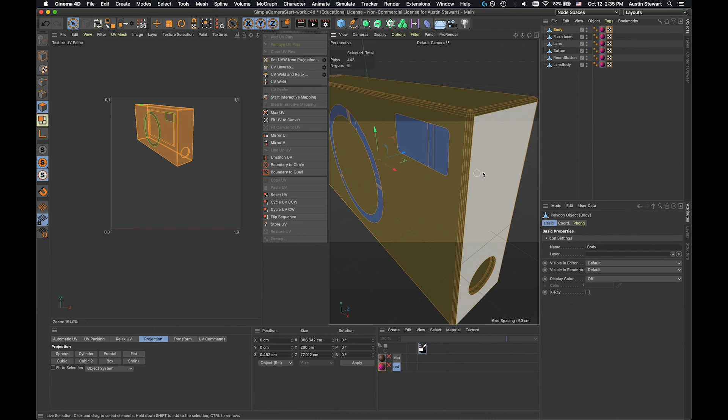Because this is, even though it's got holes, it's technically a watertight object. And we're going to need to do some work to get that to function well and be something that we can easily work on. And there's some of these areas where there's what I'm going to say are like more challenging surfaces, and we might want to cut those away from the rest of the object in order to make sure that everything goes smoothly. So I'm going to go ahead and get started.

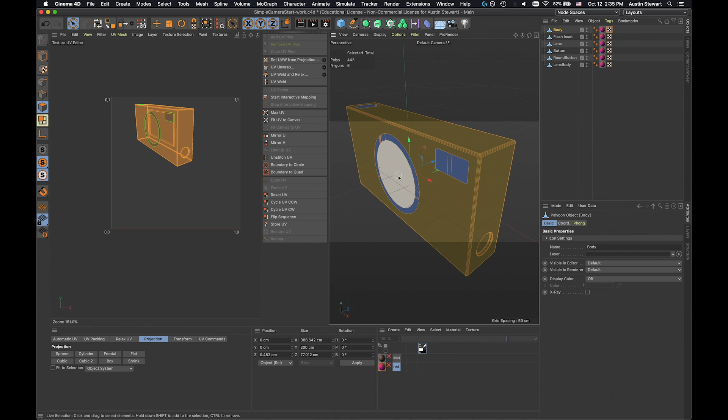And let's say we want to start with this object, this front face. And I'm not going to select any other rounding on here. I think I'm going to leave that for the other objects, just so we can get started with something reasonably simple. So what I do want to do is I want to select this polygon, and I want to hold down Shift and select this polygon. And I just want to go ahead and click UV Unwrap.

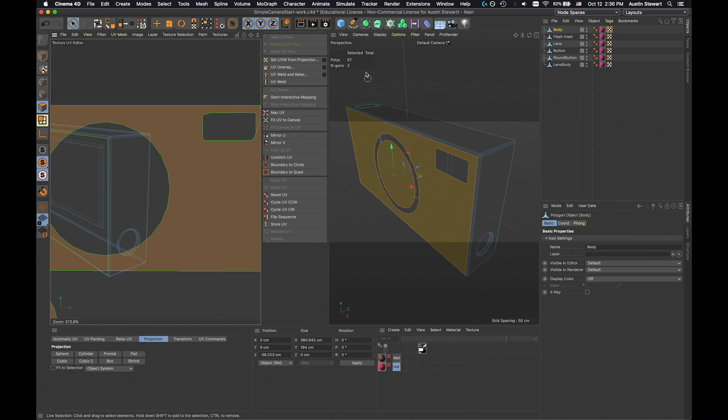And when I do that, I get what at first looks like an okay result. But when I look up here at this hole here, it is totally and completely distorted. Right? If I was to go turn back on my shading, you should see a lot of warping happening here, and then this is actually rotated on its side as well. So neither of those things are what we want. So I'm going to undo that action.

And we're going to do a trick here in order to get these to be aligned to the way we want them to. The first thing we're going to do is we're going to rotate our view so that the front of the camera faces the camera. Right? Okay, so the front of the camera is facing the camera. I can select both of these polygons again. And then I want to look at my orientation. Y is up and X is to the right.

And I'm going to go ahead and go to my 4 views. I'm going to look for one where Y is up and X is to the right. Right here, Y is up and X is to the left. So what I want to do is I want to say, okay, well, it's not the back. I need it to be the front view. So I'm going to go to Cameras and switch from back to front and zoom in a little bit.

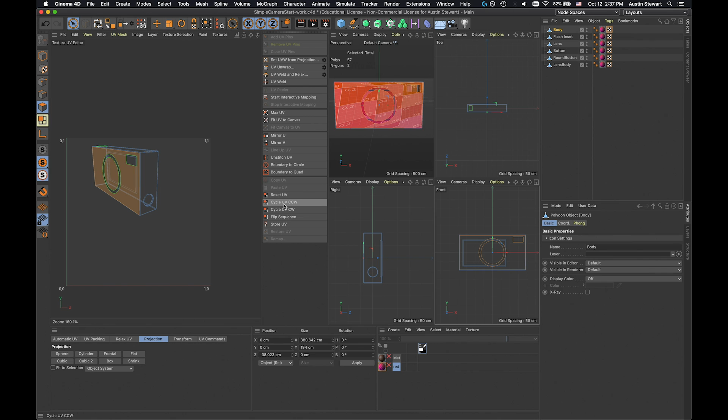And then what I can do at this point is now I can do what's called a frontal projection. And so I'm going to go ahead and go to my projection, and I'm just going to click on frontal. And what that does is it very cleanly orients this and makes sure there's no distortion. And so now when I look at these numbers, right? They're aligned, everything is happy and good to go.

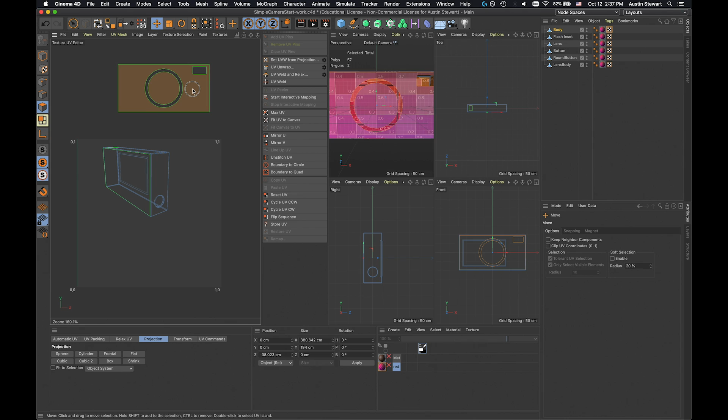So I'm going to go ahead and use the move tool. I'm going to hit the letter E. I'm going to pull this up out of the way, and I'm just going to go to select, hide selected. Okay, and what's nice now is we haven't really seen this in the other ones, but as we get rid of planes, because we have solo mode on, if I had solo mode off, we would still see everything, I think. But because I have these things set, we just see the geometry that we have left.

So let's go ahead and look at what else we have to do. So this is another one that's got a hole in it, and that's, again, going to potentially be problematic.

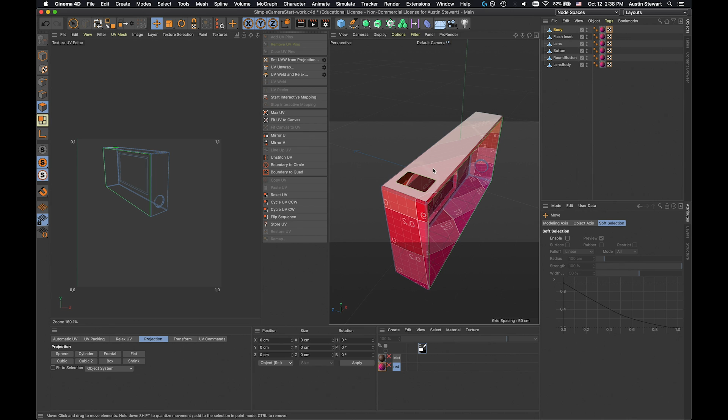Now, with this one, what I think we should do is take all the rounding on this one too, because I want to show you how we'll deal with that. So we're going to select our top polygon. I can use the move tool, I could use the live selection tool. And then we need to change our display so we can actually see.

There we go. I'm going to use the grow selection command to see if I can grow my selection to select all of those additional polygons I need to select. I could also probably use loop and then fill. So let's try that first, actually.

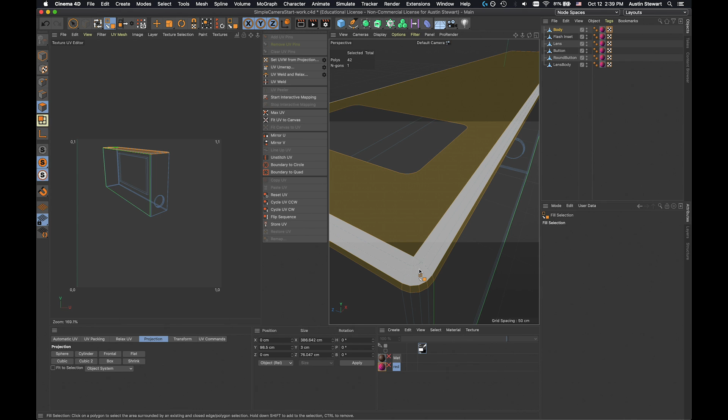So I'm going to hit the letter U, the letter L. I can loop this. I'm going to hold down Shift, select that, and then I'm going to hit U and F. And now I can fill in the rest of that selection, right? So this is another quick and easy way to select all of those things. So I've got these selected.

Now I'm going to rotate my view until this plane is facing the camera. The Z is up, the X is to the side, to the right. That's my perspective view. Here we go. Here's the top view. I'm going to zoom in just a little bit. I'm going to do a frontal projection.

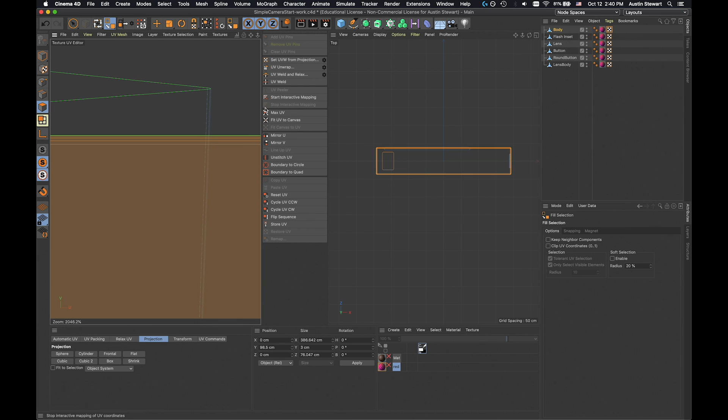And now I have something that I need to do. With this frontal projection, these are not proportionally sized, right? They're squished together because we're looking straight down on the object. And we want these to be spread out more. So I should probably do a UV unwrap.

Now, if I do that, things go very sideways very quickly, right? So that's not what we want in any way, shape, or form. And I can tell you from experience, even if I go in and cut these corners, that center shape is still going to be totally distorted. So I want to be in polygons mode, and just select this center polygon.

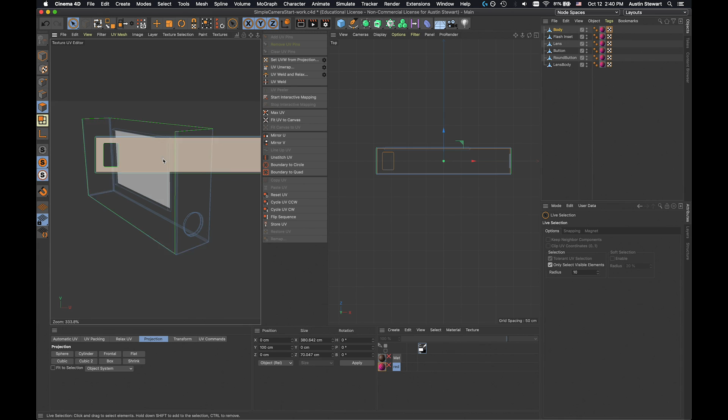I'm going to use something called UV pins. I'm going to add some UV pins to this, which will pin this in place while I'm able to open up and manipulate the other parts. I've selected that center polygon. I'm going to hold down Command or Control, and click on Points Mode. That selects all of the points for that top polygon, these internal ones and those external ones.

I could also have gone to Points Mode and loop selected the outside polygon points and these points, but this is a faster way. I'm going to click Add UV Pins, which should pop these up in red. If it doesn't, you can click off of it, click back on it, and they'll show up in red. Then I'm going back to Polygons mode and double click to make sure I have all the polygons in that selection set.

I'm going to zoom in on a corner just so I can see what happens, because this is an oblong thing. And I'm going to hit UV unwrap. As soon as I do that, this whole thing expands. You'll see that my interior stuff has stayed the same, but clearly I'm having some issues with the geometry on the side. So I'm going to go to Relax UV.

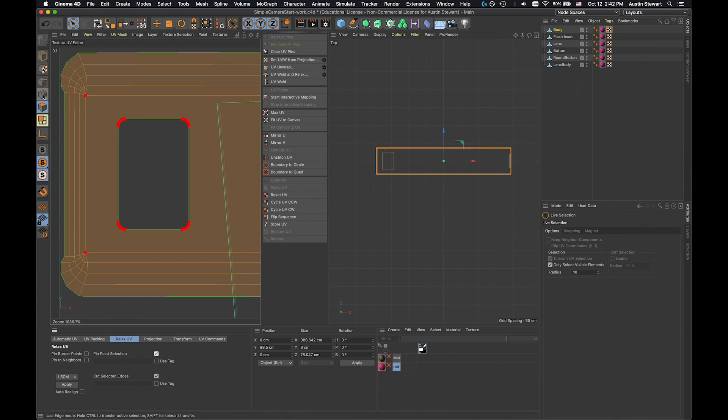I have cut selected edges already on. And I'm also going to check mark the Pin Point Selection. I think I should be good just with this. So let's go to Edges. I'm going to go to the Move tool just because it's easier, and just see what happens. So I'm going to cut those.

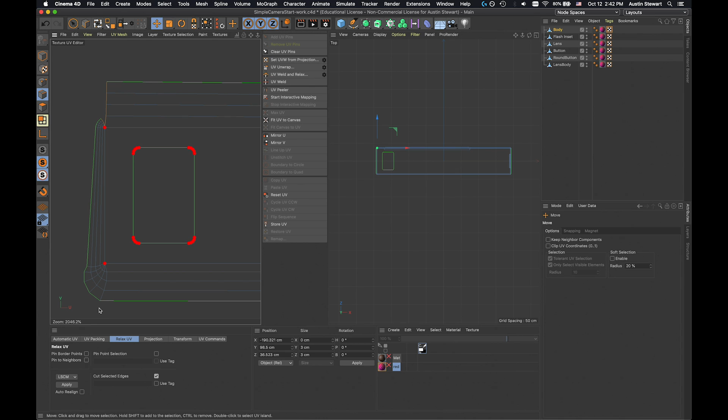I'm going to hit UV Unwrap. It jumped way down here, but that's at least a good sign that something correct is happening. I am going to undo that though, and try and center my view again. I'm going to actually try cutting it here and see if there's much of a difference in terms of how this works. So I've got UV unwrap.

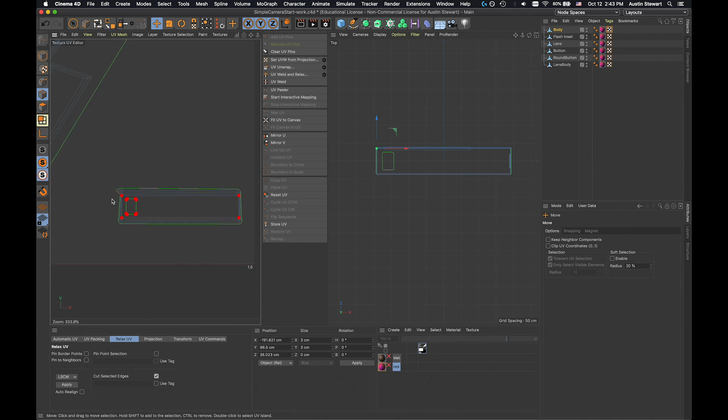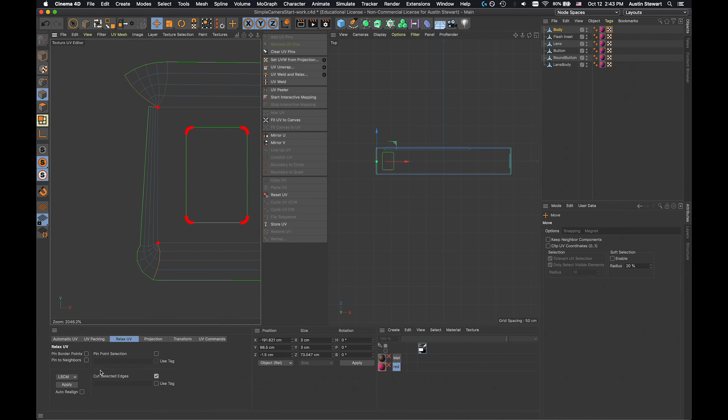Yeah, it doesn't really seem to matter. They're still scaled strangely. So I'm going to go ahead and just hold down Shift and cut there as well. And I'm going to say, I can do UV relax. There we go. This is with the LSCM. I clicked it down here, which cleaned that up a lot.

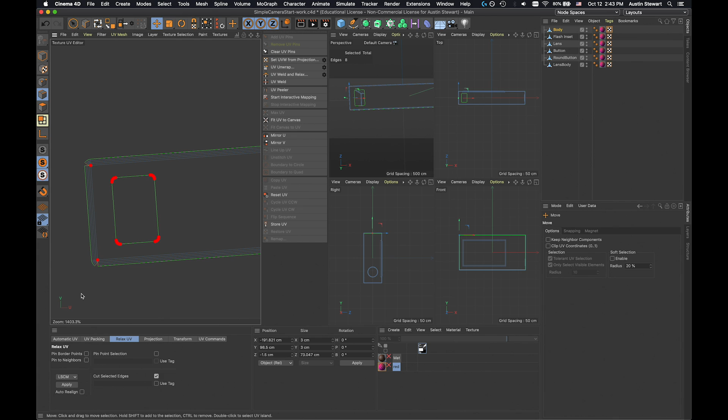So let's go ahead and... which ones did I select on the other side? Don't know. Oh, the vertical ones. Come down here. Shift click, shift click, shift click, shift click, and while I'm at it, to speed things up a little bit, rather than do this, because I think this is going to work really well, I am going to go ahead and shift click to select all of these. And I'm going to go ahead and hit apply.

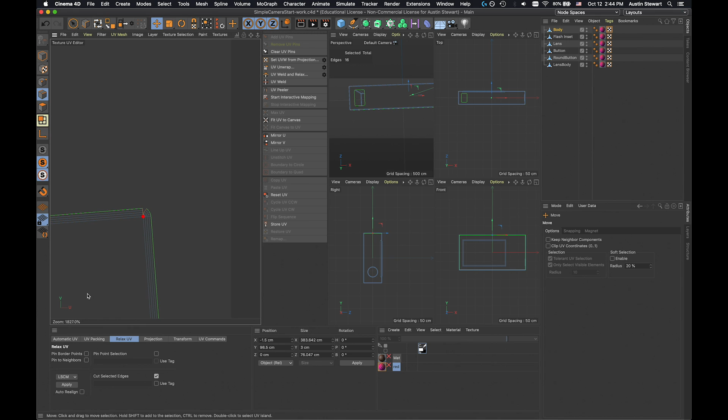And now that I've done that, I've actually got a pretty nice, evenly shaped object that it looks like needs a little bit of rotation. So I'm going to go ahead and go to polygons mode. I'm going to clear my UV pins, and then I'm going to use this tool. I'm going to come down to the edge of this panel, and I'm just going to rotate until it's more or less there. And I might zoom in a little bit.

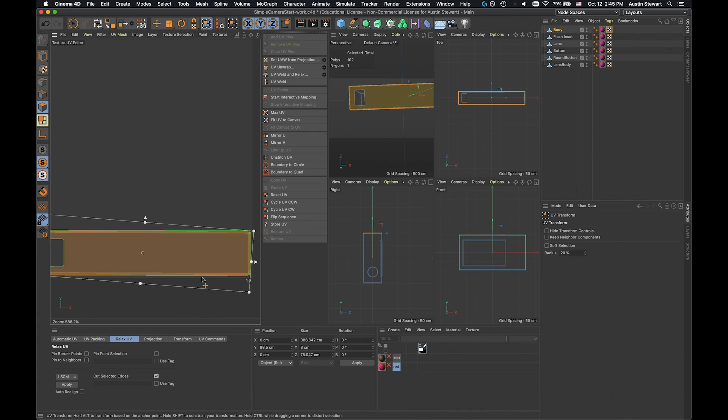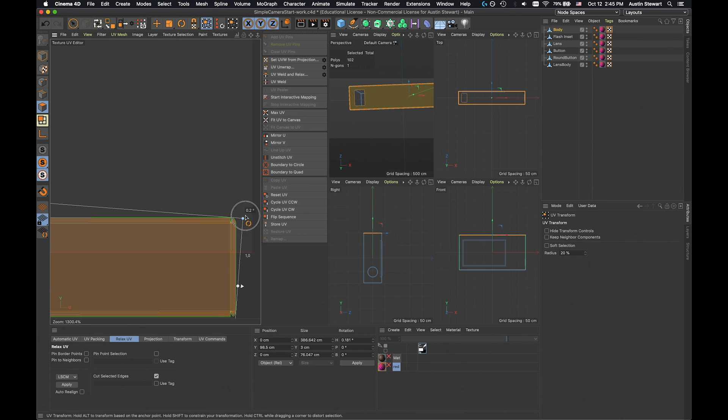It looks like it's off by a hair. There we go. Still looks like it's off by a hair right now. The joy of... that looks pretty good. Okay, so I've got this one selected, so I'm going to hit the letter E. I'm going to move this up here, and I'm going to say select, hide selected. Okay, so that's hidden. So now I've got all of these other polygons.

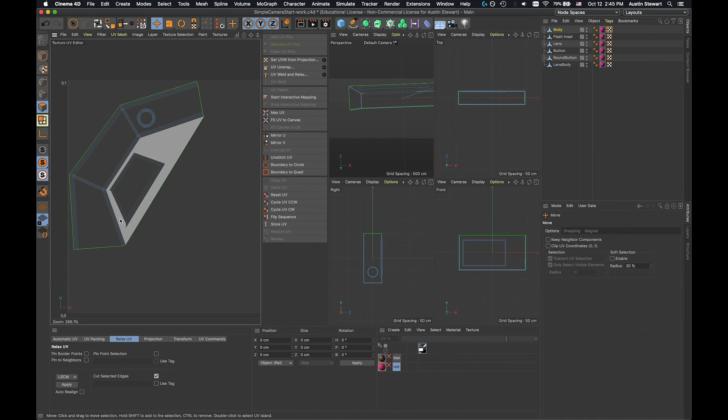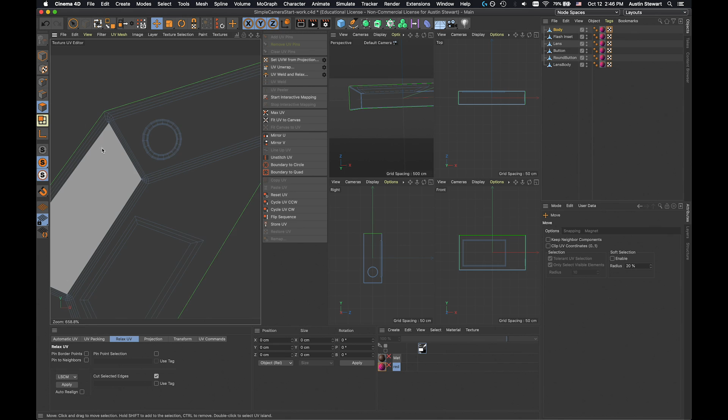Now you'll notice none of these has a hole in it. And so let's just see what happens if we start cutting corners to start to peel this object apart. Right? And so I can tell that I probably want to cut one of these corners off, and I'm not sure which one I want to start. And we may get to a point where this is really problematic, and we might want to do another frontal projection over there.

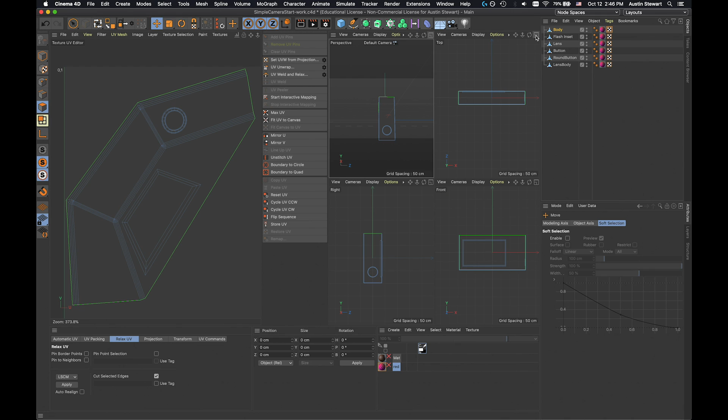In fact, I think we might want to do another frontal projection on both of these to make them a little bit cleaner. So let's go ahead and do that before we get too far ahead of ourselves. So I'm going to switch views back here. I'm going to rotate my view. I'm going to say, okay, let's take this one, and that's got Y with the Z to the left. There we go. This is the view I want.

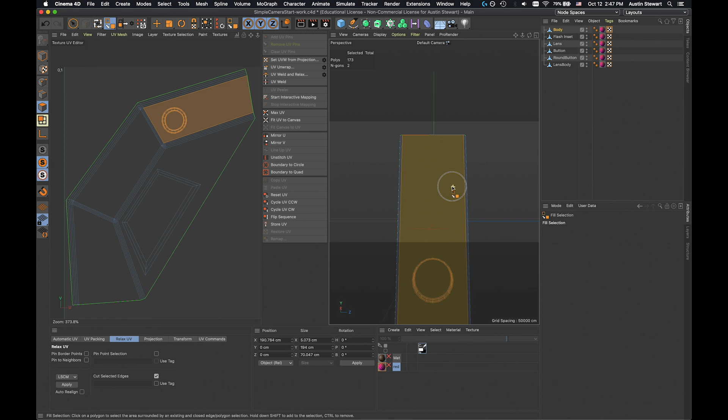I am going to definitely select these polygons and do UF for fill and hold down Shift to select all of those polygons. And I definitely need to take at least one of these edges with me, so I'm going to go back to my perspective view and figure out these are the ones that I definitely need to add. So I'm going to use the live selection tool and just select all of those and unselect that one and then go down to the corner. You do want to make sure you don't miss anything here.

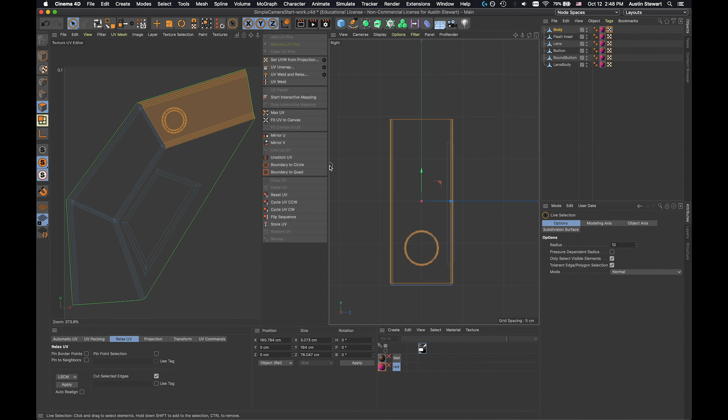Now, I could actually just leave those edge polygons in place and they could be part of that bottom piece. I think I'm going to go ahead and do that. But maybe I will also grab these other edges here just to make life a little bit more even. Okay, so I've got all of these polygons selected. I'm going to go to the right view, and I am going to double check and make sure I didn't grab anything above that. Perfect.

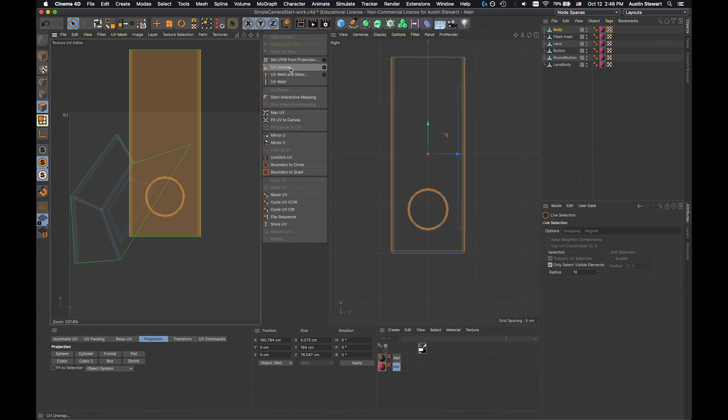So now I'm going to go ahead and say projection and frontal. Right, and you'll see it's created a new scene. It's broken that out. And again, what I'm going to want to probably do here is make sure that when I go to relax this, because if I say UV unwrap, actually that worked surprisingly well. I'm really happy with that. So I don't need to do any additional work potentially. What I am going to check is if these are pretty uniform the way they are.

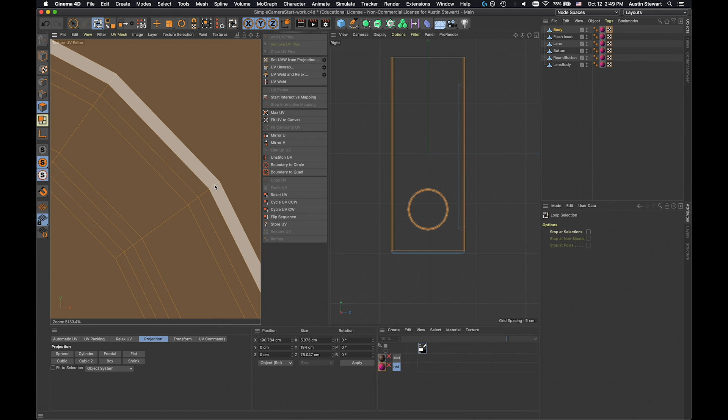So what I may do, just to make sure everything's good, and I may undo this, is to do a loop selection, so UL, and zoom in some and try and loop select this edge, and then do UF, and hold down Shift, and for some reason the fill does not work in this view, so I can go back here and do the fill selection.

And then if I go down to Relax UV and I uncheck Cut Selected Edges, and I check mark Pin to Neighbors, and then go to ABF and hit Apply, I might get a slight variation in this internal thing where it spreads out just a little bit.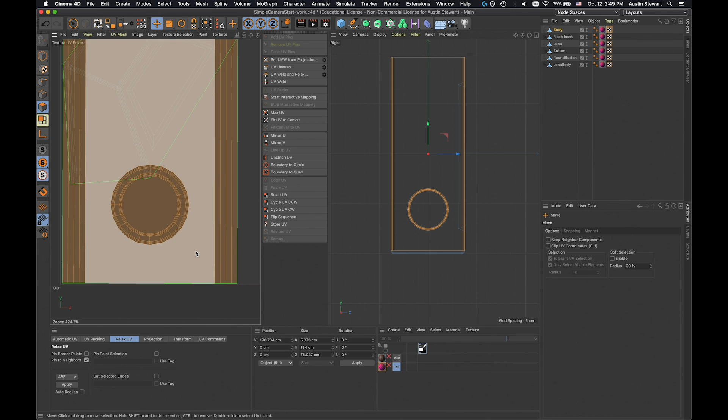That's the only fine-tuning I'm really interested in doing. These edges unfolded beautifully, so I'm going to use the Move tool, double-click to select all of this, then click to drag it up and out of my way, and select Hide Selected.

Okay, so now I've got these last few panels. This is so rectilinear, I'm going to try this and see what happens. It's really hard for me to determine where that edge is that I want to cut, because I'm going to want to cut through all of this.

I think it's out here, so I'm just going to go ahead and go to Edges mode. Notice I have no polygons selected right now, so for any of this to work, I'm going to need to go in and select my polygons.

So I'm going to come down here and start by cutting, all the way to there. Let's go ahead and say Cut Selected Edges, uncheck Pin to Neighbors, Apply.

That has actually already made a huge impact on the shape of this thing. So now I just need to go ahead and make those cuts on the other side. It looks like I will need to make a cut here.

So I'm going to hit Apply. That helped out a lot. I'm going to come up here to this top one. Make sure I have actually selected that.

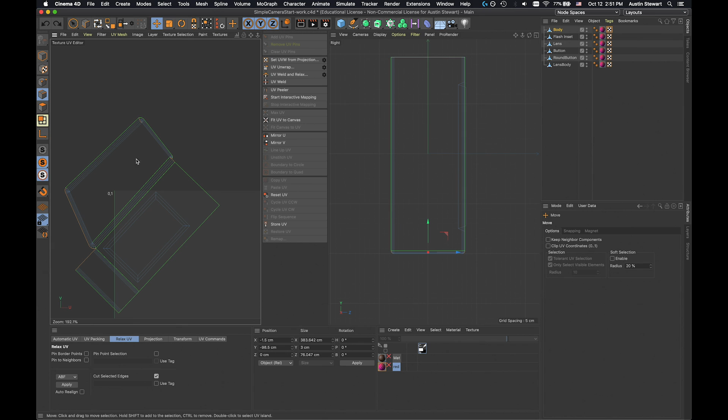It looks like because of the way this is, that I've cut this apart, I'm going to need to go ahead and cut this one. I'm not quite sure why there's a seam right here. Let's go ahead and apply, let's do LSCM. Let's apply this.

Something crazy is going on with my object, so I'm going to undo a few steps because I'm not quite sure what happened there.

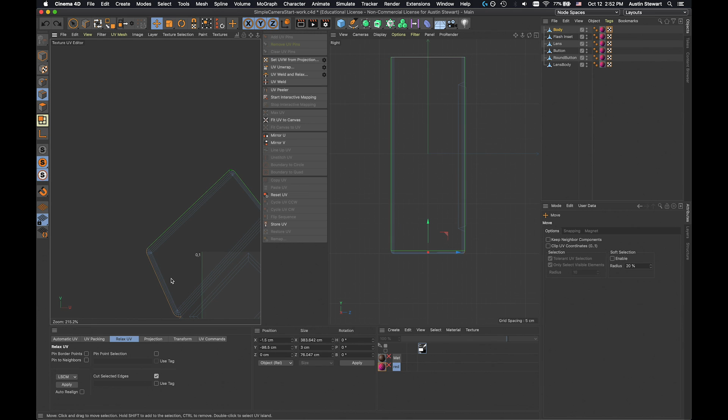So the first thing I'm going to do is actually cut here. Let's just go ahead and hit Apply. Okay, that was a much better result.

In fact, minus this top edge up here, that's probably all I have to do. So let's come in here, we will say Shift, cut all of those and apply.

That cleans that up a little bit, and we'll come down to this other side and do the same thing. You'll notice I accidentally selected another one here, so I'm going to hold down Control and get that deselected, and hit Apply.

All right, so now, even though my object is sideways, I can come here, I can select all my polygons, and this unfolded really nicely. So I'm just going to leave that the way it is.

And now it's time to rotate my tile so it's reasonably straight. Move it down so I have the bottom of the window to look at, and maybe I'll zoom in a little bit.

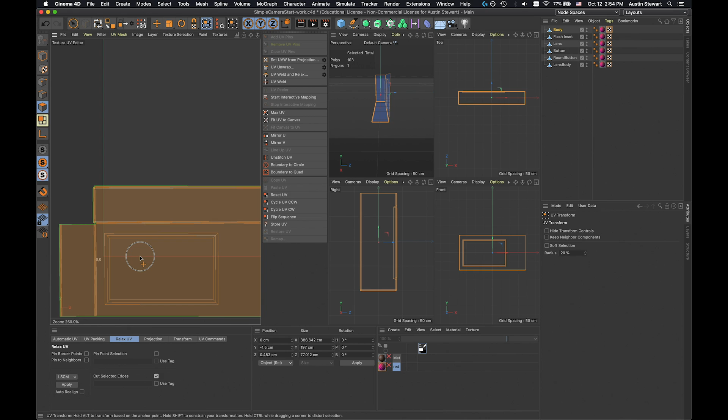Looks like it needs to be rotated just a hair more. There. Looks like I just need to go. That is pretty good. If it's off by a hair, nobody's really going to notice.

I've got all my cuts. It's flat, it's square, it's true. So then what I'm going to do is come up to Select. Actually, I still have that—that should be the rest of that object.

So I'm going to go ahead and go to Select, then Unhide All. I am going to deselect all of my islands. Then I'm going to go to UV Packing, and I've got everything set the way I want. I'm going to hit Apply.

Now, when I do that, one thing I do want to note is, are these all actually oriented the way I want them to be oriented? I can look at this—this is the top. It should have done equal island size. I'm not quite sure why this is scaled up larger than this island, but it is.

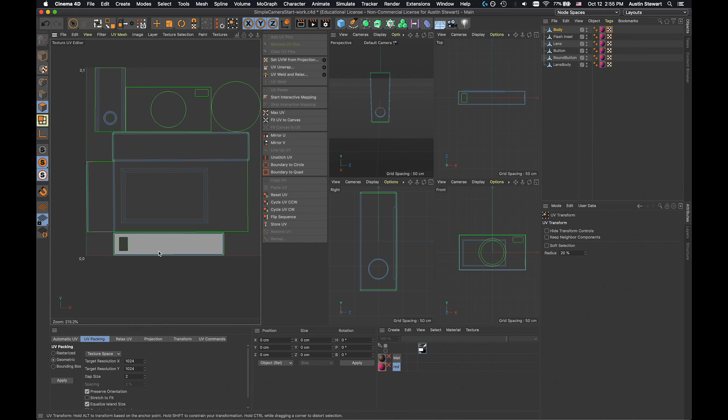The only last thing to check is to make sure that the scale on all your objects matches or is reasonably close.

So with these two, right, this should be about the same size as the back of the camera, so I'm going to go ahead and scale those up a little bit as well. You just want to make sure that everybody is about right. Okay, so this is about the same.

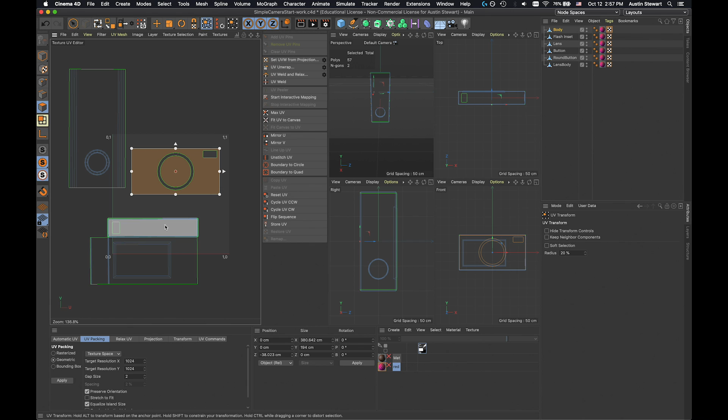Oops. These two are about the same. Now, this is that one edge. We'll see. Let's go ahead and preserve orientation and equalize island size and hit Apply.

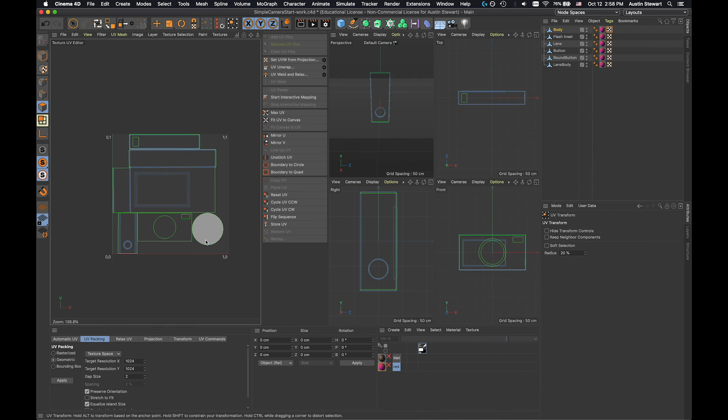Let's just see what happens. So this edge did shrink down some. All of these things changed orientation to some degree. I'm not quite exactly sure why.

Let's go ahead and undo that. There we go. I unchecked equalize island size, and I actually got a much, much better result. However, this one island is enormous, right? And it should actually be about the same scale as that island over there, so I'm just going to scale it down until those two are really close in scale.

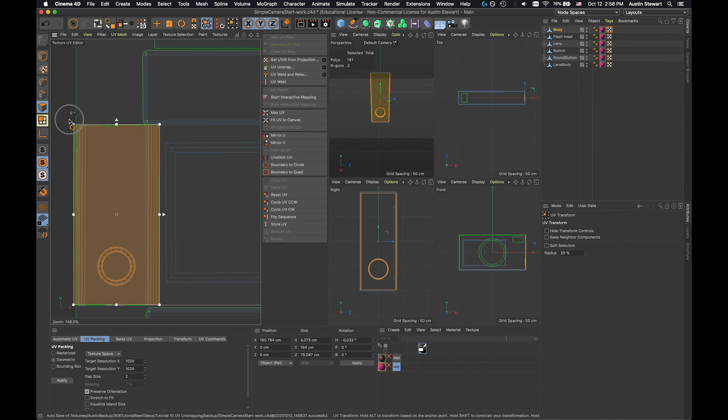And you can see that each of these is offset just a hair as well, so I could manually adjust some of these shapes and then put them back close to where they were. Right, so that one's pretty straight and true. This one is still a little tiny bit crooked, but now I can use the edge of that other object to fix it.

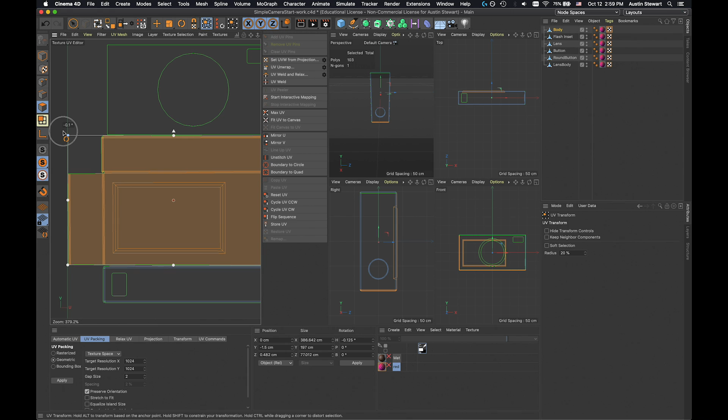There we go. And then this guy down here was pretty straight already, so stick with that. Okay, so we've got all those islands.

All right, so I'm going to go ahead and save my work. I've done all the objects now, and the last thing we need to do is bake these into a single object and then a single material.

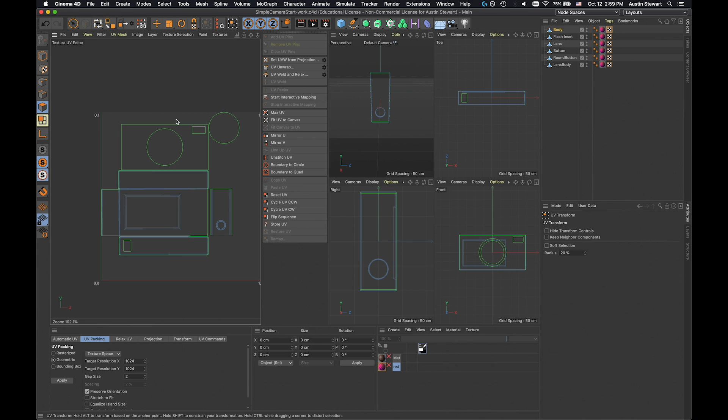In this section of the tutorial, we are going to take this object that we've taken all the constituent parts of and created our UV maps, and we are going to join these together and then bake the texture, and we'll talk about what that means in a second.

So first, what we need to do is apply a different material to each one of the objects. I have 1, 2, 3, 4, 5, 6 objects, so I'm just going to copy this material 6 times to start with. I'm going to hold down Control, click and drag once, twice, 3 times, 4 times, 5 times, so I should have 5 or 6 copies.

And each one of these materials I'm going to change the color on. The way this map works is there's this gradient grid that's being blended with some base color. So we can just go to, say, a true blue here, and things are going to look a little more purple. Then what we'll do is delete the material tag off of each object and apply the new one to that section.

So there's blue. I could rename these, but I'm lazy and I'm not going to do that. I'm going to make this one green. And so then I will delete the green off the flash inset object, and I'll apply that there.

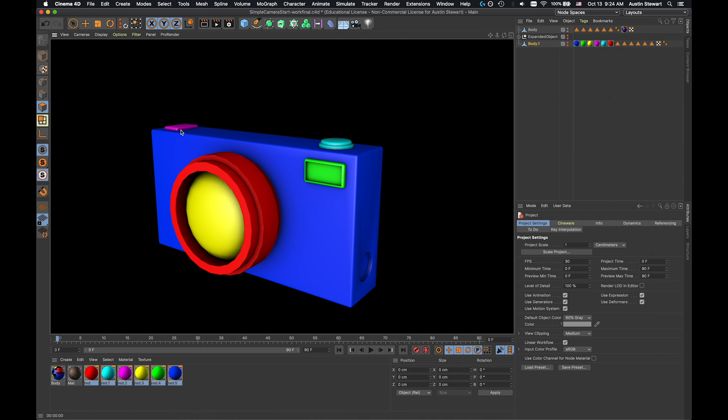Once it's done, we now have this new material, which if I go back to my standard layout — where is standard? If I go back to my standard layout, you'll see there's some weirdness on here, but if I render this, I've already got some shading from the ambient occlusion, and I've got all my materials. You'll see that body.1 is now turned off as well. It automatically hides it. So this is the object that I'm working with.

If I look at this material and double click over here, you'll see that this one texture now has all of these different colors laid out in different places. This has set me up to then go forward from UV edit and go into BodyPaint, and that's the next thing that we will work on in the next set of tutorials.